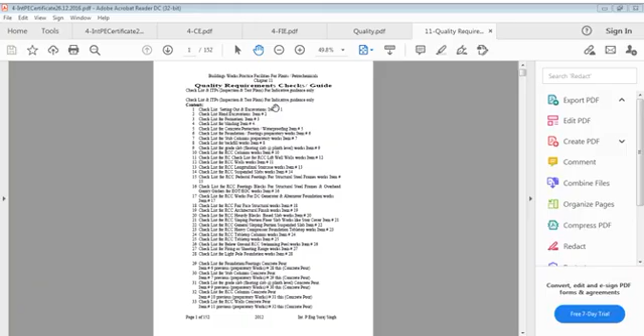Role of quantity, role of quality, all play a very important role in our life, in our world. You have to understand very well these points: quality issues in life and quality requirement.

I suppose nothing moves, or it moves only on tracks without any direction, without any strength, without any reliability.

When I say reliability, when I claim reliability, that means dependability, dependability involving safety, dependability involving service, and dependability involving durability, and all other factors we have to consider in our profession as well as in life.

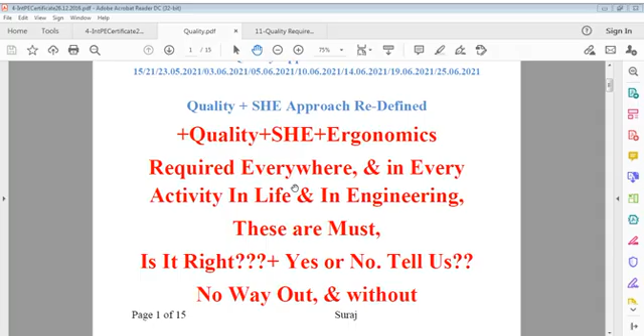Okay, I have supervised this project and it has been done according to this and this, and sign. Even though nothing was supervised, nothing was made sure, but certification exists. What do you call it? I don't understand. Just by a certification, if you assume everything was true, I can't believe it. And that's where lapse of quality occurs.

No quality, no SHE, nothing can work. In our construction we say safety first. Safety first. Safety means safety of every consideration. Individual safety, group safety, work safety, environment safety, health safety, everyone.

It's not simple that I should be safe alone. Scaffolding should also be safe. My colleague should also be safe. My site should also be safe. Traffic should also be safe. Water that we use should also be safe. Everything should be safe. It's not simply that I am safe as an individual.

You are safe if others are safe. Your group is safe if your thoughts are safe, if you comply with requirements of safety, then you are safe. Personal safety, PPE we call personal protective equipment, that's only one part of safety. There are many other parts of safety which can only be elaborated in safety subjects.

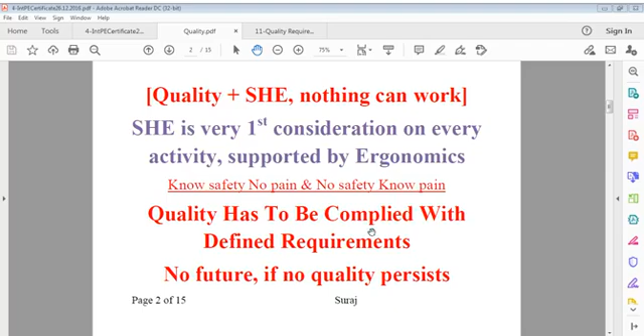If you don't comply with quality, the product is not responsible. The future of the product is not responsible. It is you who are responsible. We say engineers must realize quality facts. I say, why engineers only? Everyone.

Engineers, of course, they lead, but quality is for everybody. There can be no acceptance to discard quality. If you discard quality, I don't know what you achieve.

I don't understand that. Some people relate loss of quality to gain of money. How? If you lose quality, how can money come in? You may say you made money, but I don't know how you could make money by loss of quality. Robbery is there - how do you want to rob it? Loss of quality doesn't mean gain in money. There can be no gain in money if you lose quality.

Yes, there can be something different. If you change the specification - say you have to add 6 bags of cement of 50 kilograms each in 1 cubic meter of concrete, and you don't mix 6 bags, you mix 4 bags and make the same concrete, you can say you've saved 2 bags of cement in 1 cubic meter. But you cheat yourself, you cheat that material, and you think nobody knows. You produce that concrete by saving 2 bags of cement, yes, but what did you lose?

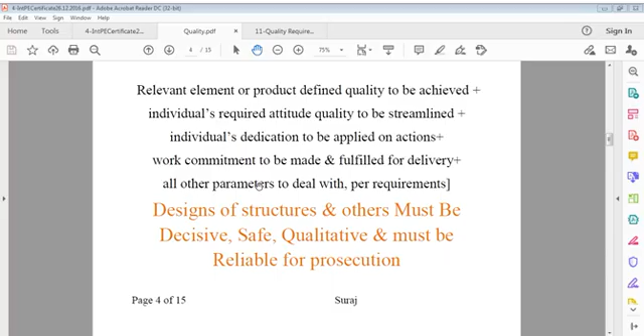Structures are structures. These are decisive because they are based on quality calculation and quality design, where everything is considered according to needs, according to requirements, according to scope of work. And it has limits, a start and an end.

Designs are never wrong if done with total control on site, control in mind. If you have experience of sites in addition to design knowledge, I think you'd be the best designer. Alone, design is not adequate.

It's the same thing as I say - CAT. A child says 'cat', and what is a cat? How a cat behaves, that child doesn't know. But that child knows this is a cat, a photo of a cat - more than that, the child doesn't know. So a designer must have a backing of practical construction. That designer can be much better than a solo designer.

Solo designer, I think, is not a requirement. Pragmatic design is a requirement which pulls all difficulties during construction into design consideration and makes provisions in such a way that site guy knows problem is solved.

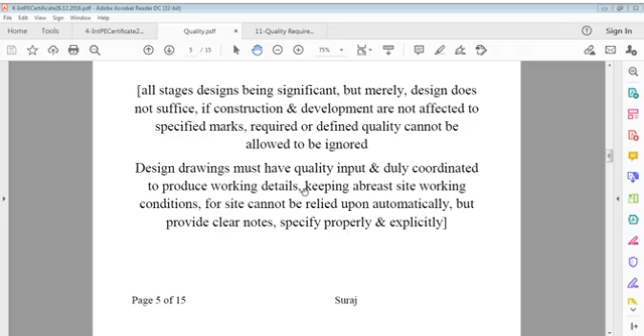If you think only theoretical, and don't think of practical problems, then there's a gap in engineering itself - coordination gap, self-coordination, coordination with others. During coordination, too much happens. I'm not going to repeat what's written on this file, but all these factors we have to consider very well, that's part of quality, design, and everything. You can't go otherwise.

Quality requirements - I have been doing this for few days or few weeks. What do we want? Every day I talk quality. Maybe those who watch this video start feeling bored, thinking the same thing this person talks every day. It's not talking, believe me. I'm talking something that critically deals with everyone.

I'm not saying you are not having a good house. You are having good house. If you think whatever house you have is good one, it's okay - it's within your bound, within your limits. But it doesn't contain what it should contain. Some people say it's enough if I have got a roof on my head, I have some accommodation, okay, that's right. I'm not saying you can't stay in whatever accommodation you have.

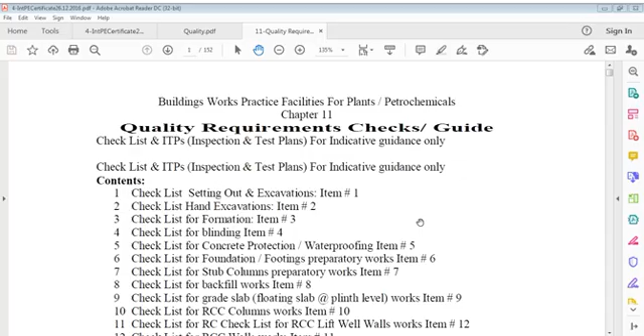Every time you have to work right. Work every time, do not repeat that work - meaning do not leave any defect to be repaired, because repair is expensive, it takes time, and it gives a bad feeling as well, a non-professional feeling. That feeling should also not exist.

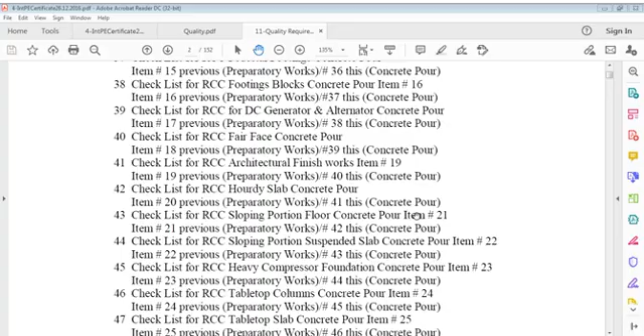There is a list of many quality issues - though it's not comprehensive, but still something is there. There are many activities on every structure, every activity works somewhere. In construction, there are many activities in every sub-discipline - building, bridges, roads, sewer lines, water lines, irrigation, railways, whatever type of building you say. A list of activities exists from commencement to completion.

Sometimes you'll see a huge volume of specifications on project and contract documents. You'll find big books with thick volumes, and in some instances you'll be horrified - bundles of drawings, so many bundles of volumes of specifications and contract documents. One gets mad immediately at this - how many documents? Yes, how many documents? This is the document, you have to read them.

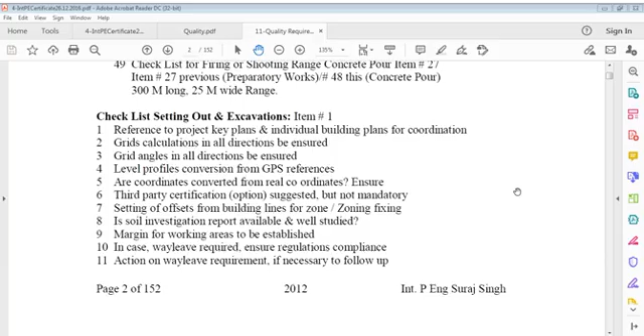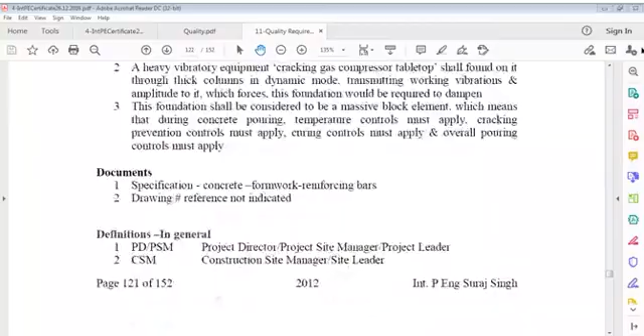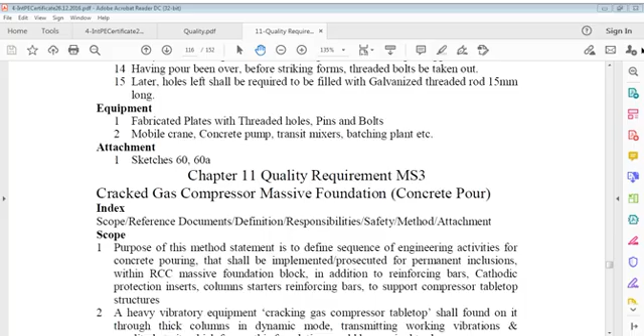Now, when I say yesterday I talked of many foundations, right? I talked of some foundation. Let me see which one I talked of before running away. It was... okay, that foundation, I just go back to the first one we talked of. I forgot also, that's my problem. Column plate inserts, no, I'm just talking of this column plate, actually inserts which were there. Just go back, see.

Alright, give me some time and I'll be back in a couple of minutes. I'm feeling thirsty also, let me take some water as well. Back, hold this, take water now.

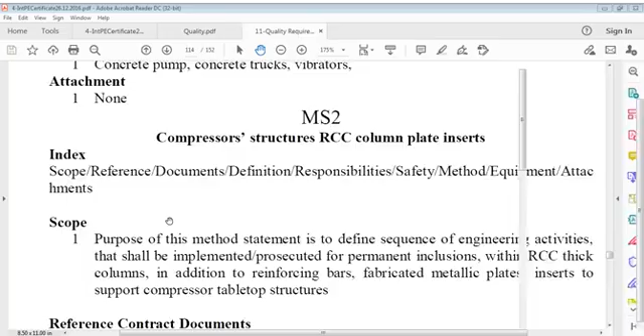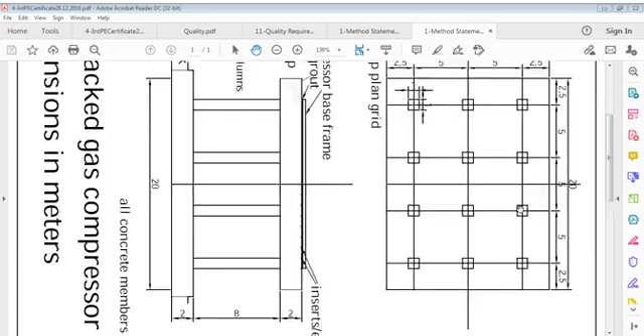I don't know, let me start the Zoom, let me see if I can show you that one. I'll just close this file, otherwise... this is actually your tabletop. This is tabletop, okay, I'll keep it open because I am going to do like that. It's a kind of tabletop, of course, and there's another one which I'd like to share again. Maybe that's that one, no, it's not that one, it's another one. Okay, that's another one, so there's another sketch, okay fine, there's two sketches, no issue.

I'll try to find that sketch once again, it's an important one because I have to explain to you on this, just to remind you what I was talking about. Sometimes we forget, it happens because there are so many sketches in this, and I have to show you. Maybe, I think it is in method statements, chapters, sketches, and that sketch is here. I hope this will be column plate inserts, if I can get it. Pipe culverts, what is the... column form, column inserts, I think maybe it's that one. So I got it, it's there, so I got it here, and it's another one, it's two, I say.

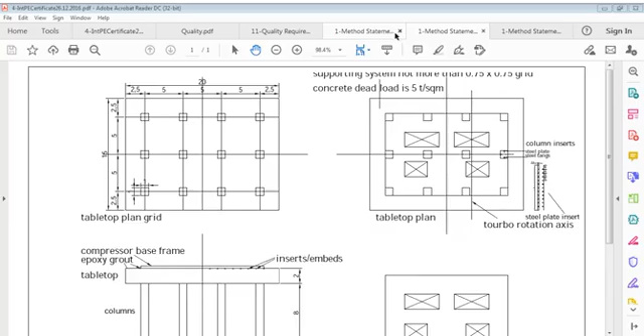So first I will talk about the inserts and the relation of this column. The inserts I'm going to discuss with you are in this column. How many columns are there doesn't matter, columns are there in this way, or columns maybe are just like this, there are different sizes of foundations. I am talking for means, just don't stick to what the sketch is, but stick to what's required.

In these columns here, we say in this column there are inserts here. You can see steel plates, insert plates here. These are steel plates here and steel tangs here, steel plate and steel tangs. These are meant for some reasons in thick material, thick members, and maybe generally steel is used for some purpose.

Here, bars are all in for tension, compression or bending moments. But these are here because this is a thick column, and you can say this is a kind of concentrated reinforcement. Just like we say in beams and columns, we say in deep beams and deep columns, this is concentration. Or you can say skin reinforcement, you may say that, I think that's the right word.

Skin reinforcement, so this can also be called that, because this is only one insert with ties at different locations on one side of the column. It's given as one, but it may be two. Let's say one is enough there, or two are enough there, depending on design. So we can say this is a kind of skin steel fabrication, fabricated steel fixed at some side, and it could be called a skin plate, or this is a fabricated plate put in column sides for whatever reason.

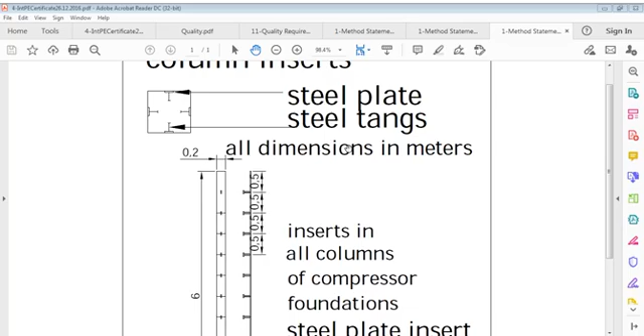It depends on requirements. So you can see this kind of additional reinforcement that goes in addition to the bars here. These bars mean stresses to take at this support for skin sides and all that. That's what I understand. These are inserts.

I call them steel plate inserts. This is the plate here, and you can see these ties, for example 1, 2, 3, 4, 5, 6, 7, 8, 9, 10, 11, or more. Inserts in all columns of the compressor foundation. This is what it says, and we have to understand this point.

This also, another one, size of column is 1.5 meter by 0.8, and also there are safety requirements which we discussed here, and we have to take all into consideration.

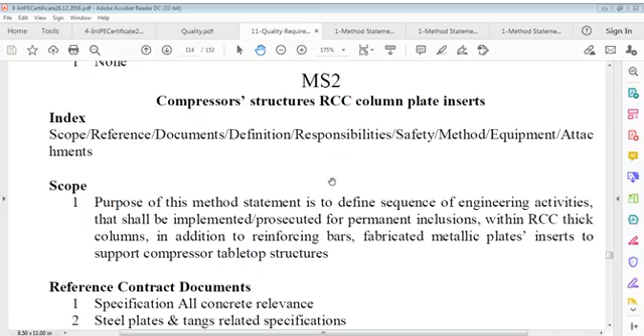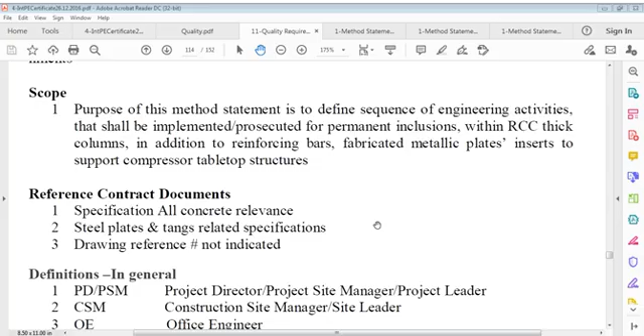But now we are talking of inserts here, and this requirement, what it says about column plate inserts, we talked before. So we have to say, in fact, the purpose of this method statement is to define the sequence of engineering activities that shall be implemented and prosecuted for permanent inclusions within RCC thick columns, in addition to reinforcing bars, fabricated metallic plates, inserts to support compressor table structure.

This was its requirement, and I'm not going into responsibilities and all that because you have already heard this. I was telling you, now I'll go to the same inserts which will be required in the tabletop as well, but now I'm going to discuss the quality requirements. The name is this quality requirement of this file, and this is chapter 11 of this file.

That is, may say, file of facilities. This is for facilities. You can say facilities means plant. Plant doesn't mean small plant. This means process plant, where there's some technology involved in production of something or reformation of one product to another. That is this one. We may call it facility, you may call it plant, you may call it whatsoever, mega project.

Generally all such projects are mega because these cover a lot of space or area, you can say in kilometers by kilometers, and generally there is one original plant which we call refinery for fossil fuels, where raw material is received and processed. That's called refinery, and there are so many byproducts from that process plant which are further required to be transformed.

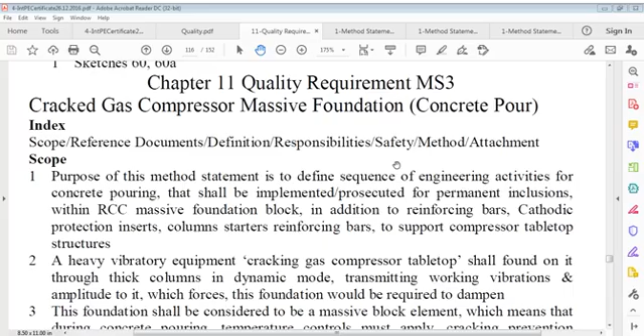We have to take this into point. Now I'm going to just talk on this concrete pour. Purpose of this method statement is to define sequence of engineering activities for concrete pouring that shall be implemented, prosecuted for permanent inclusions within RCC massive foundation block, in addition to reinforcing bars, cathodic protection inserts, column starters, reinforcing bars to support compressor tabletop structures.

A heavy vibratory equipment, called cracking gas compressor tabletop, shall be founded on it through thick columns. This equipment takes its life from thick column in dynamic mode, transmitting working vibrations and amplitude to it, which forces this foundation would be required to dampen.

This foundation shall be considered to be a massive block element, which means that during concrete pouring, temperature controls must apply, cracking prevention controls must apply, curing controls must apply, and overall pouring controls must apply.

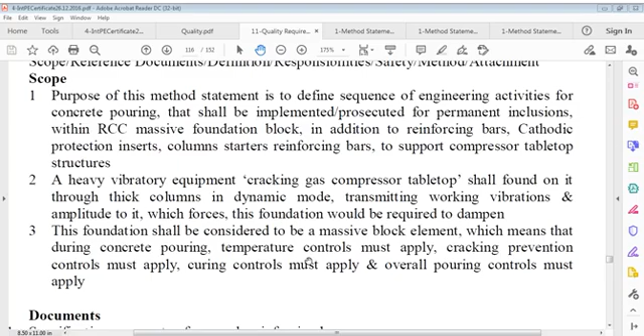Here there are some references, you know that. Then there are certain duties and definitions. Then we go to something like, very common about safety, which we say that safety officer shall monitor all daily activities being conducted or carried out.

So, safety officers shall monitor all daily activities being conducted or carried out on site, advising and implementing all safety procedures if some measures are observed missing. Now, prior to commencement of whatever activity, workforce shall receive a STARRT card toolbox talk on project safety site requirements respecting involved item or activity.

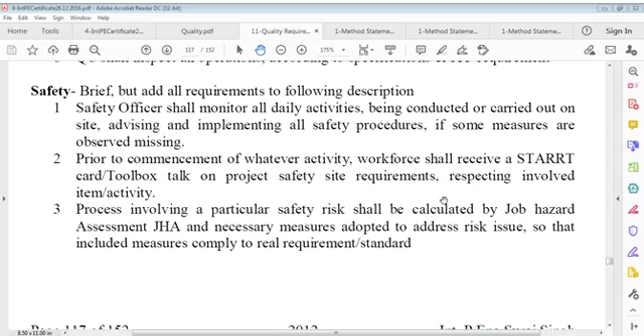Only competent personnel shall be engaged to carry out specific operations. Personnel shall use all necessary safety related PPEs, personal protective equipments, required for all pertinent activities.

Ample availability of water should be made on site for workers as well as for all other purposes.

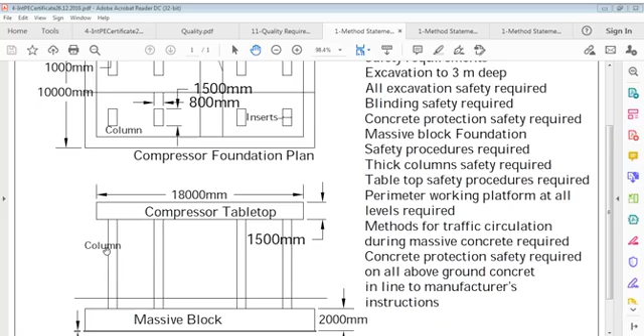The following main activities shall be involved for this foundation. What foundation? You can see this foundation, this massive block - here are the safety requirements for everything. There's excavation up to 3 meter depth - excavation safety required, blinding safety required, concrete protection safety required, massive block foundation safety procedure required, thick column safety required, tabletop safety procedures required.

Now in these columns below these foundations we are talking of, this is the foundation - this massive block. So this is set out and required coordinates at all corners to be used, and marking all areas including external working offsets.

Offsets for purpose of foundations, excavations and circulation areas for ease of construction. Recording all existing reduced levels from site within areas to be covered for excavation, reconfirmation regarding all surveys activities to determine accuracy, since no changes in setting out should be permissible due to implementable proposed running utilities.

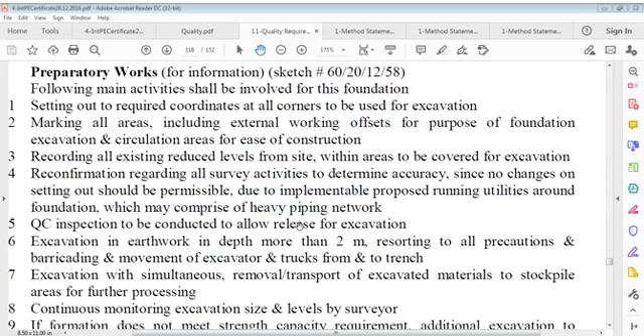We'll go to QC inspection after this. Whatever we do, says confirmation regarding all surveys, and then we have to do QC inspection, excavation, earthwork in depth more than 2 meters - we have to resort to all precautions and barricading, etc.

If the formation we reach doesn't meet the strength requirement of our design, then we have to replace bad soil from there, maybe in 2 layers or 1 layer - let us say 2 layers, it depends what you consider. Then you have to take out that soil and prepare for soil improvement in form of adding better soil. Then that was imperative.

Up to 98% of MDD should be achieved.

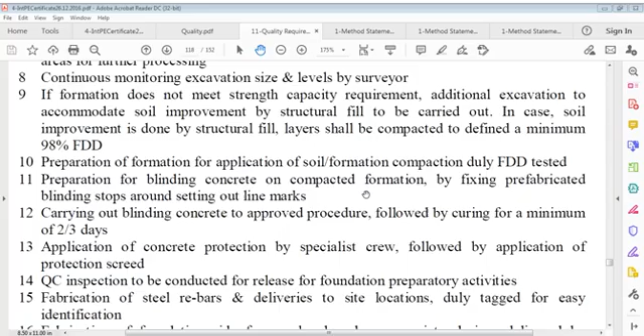Then we go to carrying out blinding concrete to approved procedures, followed by curing for a minimum of 2-3 days. So blinding concrete preparation is a must - you have to compact the area, then prepare the side shutters for blinding, which is very small, and cure it for 2-3 days. Application of concrete protection requires a specialist vendor, followed by application of protection screed.

QC inspections to be conducted for release of foundation preparatory works or activities. Fabrication of steel rebars and deliveries to site location, duly tagged for ease of identification. Fabrication of foundation side forms based on proprietary designs, preformed.

Fabrication of steel rebars and deliveries to site locations, duly tagged for easy identification. Fabrication of foundation side formworks based on the proprietary design, deliveries delivered by a specialist vendor in line to specifications.

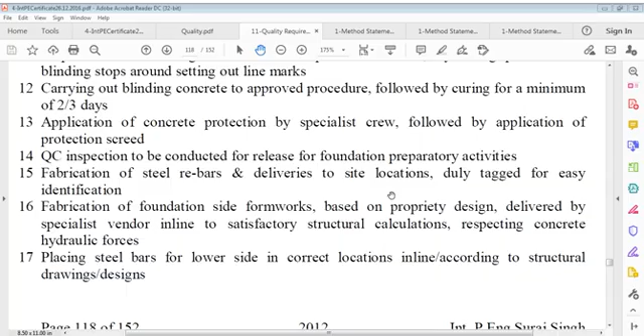There is a fabrication foundation side form based on proprietary design delivered by the specialist vendor, in line to satisfactory structural calculations respecting concrete hydraulic forces, placing steel bars for lower side in control in correct location according to structural design.

Placing chairs suitable to requirements, fabricated out of heavy steel bars to support upper layer of rebars, placing steel bars for upper side in correct locations in line according to structural drawings and designs, placing all column rebar dowels for superstructure columns, pertinent tabletop erection, installation, fixing formworks to foundation sides in line according to setting out line marks, fixing cathodic protection.

Fixing cathodic protection anodes to exact locations within foundations and welding them, fixing stainless steel C clamps and GI wire rope to main steel reinforcing bars around foundation at defined locations.

Critical cathodic protection shall be provided for such a heavy foundation in line to design provisions. Electrical continuity tests shall be conducted for records and submissions.

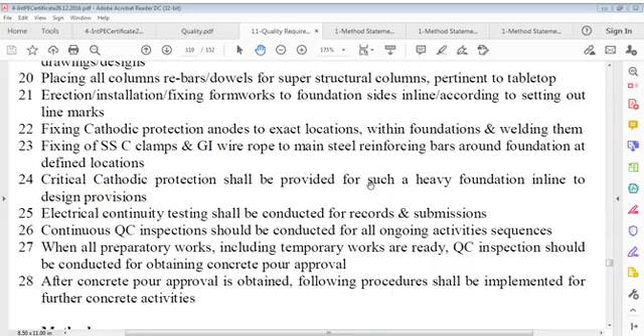I'll define this, and the other two statements are like this, just quantities will be different. I'm going to define you about this.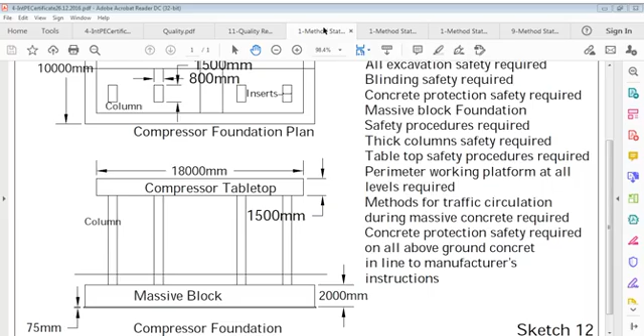So we must understand all this before going further. This method gives you details of this plan, how many concrete pumps are required, batching plant, how many work.

You may say if you need per hour, let us say whatever it is, transit mixer is 7 meter or 8 meter cube, and there are 10 numbers required.

So you have a plan of 12 hours, for example 12 to 14 hours. Let's say 12 hours means 600 cubic meters, 50 cubic meter per hour continuous delivery. Generally, efficient production of a batching plant is 35 cubic meter per hour, so you may need 2 continuous mixers working to achieve this delivery of 50 cubic meter per hour.

That point must be considered, and the plant operators know all this. You just tell them your requirement per hour, and they will arrange delivery of mixers. For example, to get 50 cubic meter in 1 hour, keeping aside some margin, they will say 60 cubic meter in 1 hour, which means every 10 minutes they deliver you 7 or 8 cubic meter, giving you 6 trucks every hour.

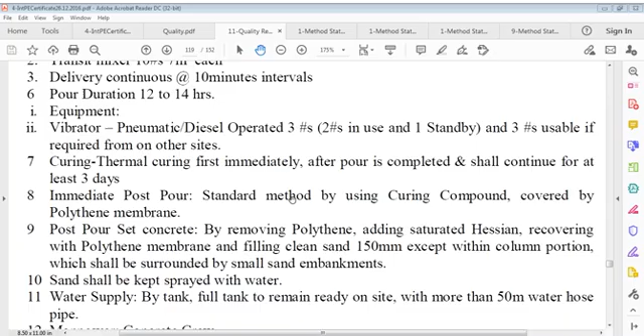All curing should go on continuously for 3 or 4 days for thermal curing application and then normal curing application. A full tank should be there to provide water, with length of hose requirement depending on site to tank distance. Generally 50 meters is enough.

Then we have to describe manpower requirement - work person requirement, concrete crew requirement, how many foremen you want, leaders, how many steel fixers you need, and carpenters you need, depending on your assessment. That is the purpose of this statement.

How many masons, because this is a big job, surface area let's say 200 or 300 square meter. Immediate work is wanted so you don't delay, you have to do it fast, which means everywhere you have to let them sit down and work. Helpers are also given according to masons - if 16 masons, means 5 or 6 more helpers with them, because the helper's job is not too much in that case, the mason's job is more.

Then we can say all specifications and requirements to be complied with, all activities to go on site. We say GGBS, ground granulated blast furnace cement, we have to use according to BS 4246, 70% replacement, utilizing 30% ASTM C150 type cement for use in massive concrete, or whatever cement you are going to use - just a reference. You have to decide yourself which one to use and how much replacement with GGBS, which is a pro-environmental material.

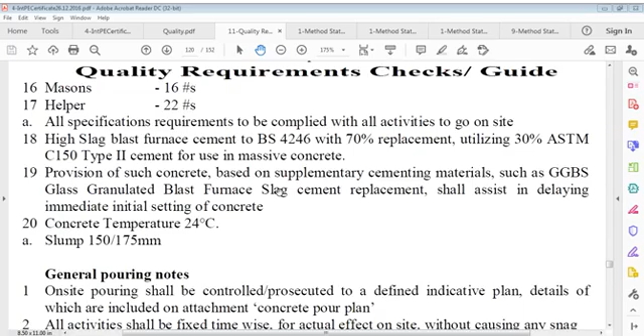So general pouring notes are... I think I have to put this down somewhere. Let me close something like that, and it's better to close like this. I'll close this. So let's go and discuss something else.

Now, generally you can say pouring notes: on-site pouring shall be controlled or executed according to the defined indicative plan which I have shown to you.

This is the concrete pour plan. These activities shall be fixed time-wise for actual effect on site without causing any snag. Locations of concrete pump, transit mixers, start points, follow-up points of pour, intended directions respecting concrete delivery and placement have been depicted on the plan. Each strip and its location vertically have been indicated to follow such that no cold joints are allowed.

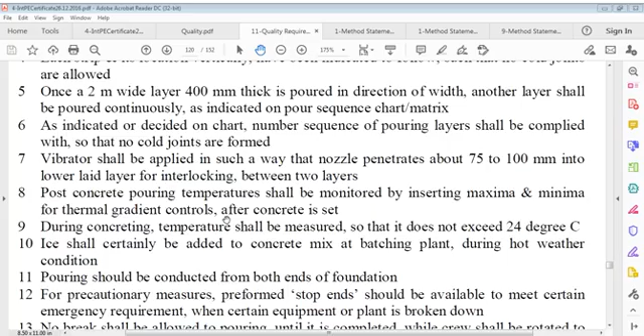Once a 2-meter wide layer, 400 mm thick, is poured in the direction of width, another layer shall be poured continuously, as indicated on the pour sequence chart or matrix. As indicated or decided on the chart, the number sequence of pouring layers shall be complied with so that no cold joints are formed.

Vibrator shall be applied in such a way that the nozzle penetrates about 75 to 100 mm into the lower laid layer for interlocking purpose between two layers. You have to withdraw the vibrator nozzle from the previous layer gradually, don't give it a shock.

Post concrete pouring, temperature shall be monitored by inserting maxima and minima for thermal gradient control after concrete is set, which requires installation of thermocouples as well. During concreting, temperature shall be measured so that it doesn't exceed 24 degrees Celsius.

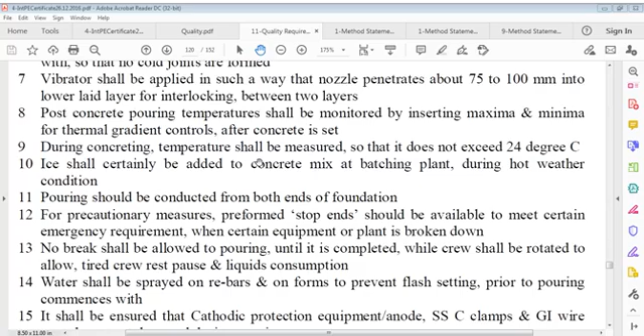Ice shall certainly be added to the concrete mix at the batching plant during hot weather conditions. Pouring should be conducted from both ends of the foundation for precautionary measures.

Preformed stop ends, meaning shutters, should be available to meet certain emergency requirements when certain equipment or plant is broken down. No break shall be allowed to pouring until it is completed.

No break shall be allowed to pouring until it is completed, while the crew shall be rotated. Water shall be sprayed on rebars or forms to prevent flash setting prior to pouring commencing. Also, no break shall be allowed to pouring until it is completed, while the crew shall be rotated to allow tired crew rest and liquid consumption. It shall be ensured that cathodic protection equipment, anode, stainless steel C clamps, and GI wire rope do not get damaged during pouring.

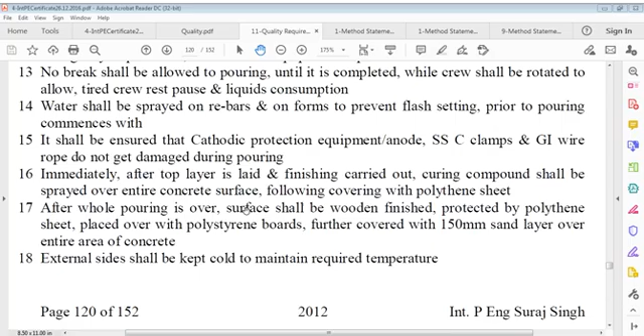Now, external sides of the section shall be kept cold to maintain required temperature. After the whole pouring is over, the surface shall be wooden finished, protected by polythene sheet placed over with polystyrene boards, further covered with a 150 mm sand layer over the entire area of concrete. External sides shall be kept cold to maintain required temperature.

Water shall be continuously poured over sand to keep the top system cold, not allowing any transmission of heat either from the surroundings or from the massive block. Observations regarding rising and falling thermometers and thermocouples shall be conducted per procedures.

So either from surrounding or from the massive block to the environment, observations regarding rising and falling thermometer, thermocouple shall be conducted per procedures for monitoring thermal gradient within the concrete. The whole area shall be barricaded with no further work allowed until the first 3 days of heat curing, thermal curing, is completed, to be followed by routine curing for a defined number of say 14 days.

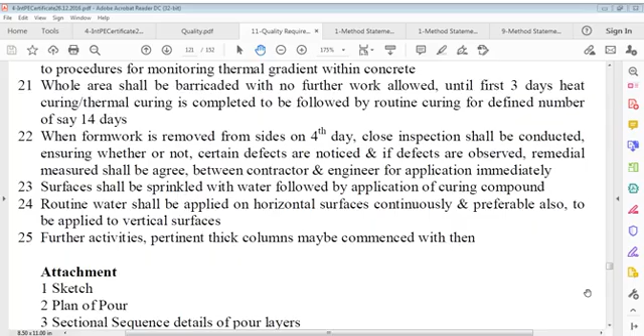So we can now go further and say that routine water shall be applied on horizontal surfaces continuously, and preferably also applied to vertical surfaces. Further activities pertaining to thick columns may be commenced with then. So attachments are sketch, pour plan, sectional sequence, details of pour. Now we are going to the compressor concrete pour.

Purpose of this method statement is to define the sequence of engineering activities for concrete pouring that shall be implemented for permanent inclusions within the RCC massive foundation block, in addition to reinforcing bars, cathodic protection inserts, column starters, and reinforcement.

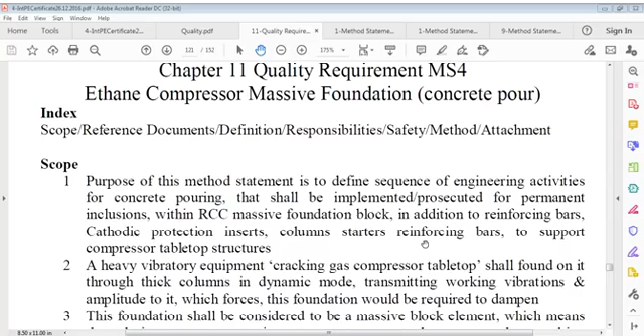So we will start this now. Scope is same as it was in the gas compressors. There's no difference in scope, and you can see specification and definitions are all the same, word by word, everything is the same.

We talk of method here, that's different. Others are same, method we talk of here is different. Every case is different, we have to keep that in mind because quantity is different, size is different.

In this case, we have a size which is 280 cubic meter approximately, maybe more, maybe less. Don't go to that one. Pour plan we have same, just like we had before, but I did not make the plan separately for this. System is same, procedure is same, length and width of plumb foundations you have to see.

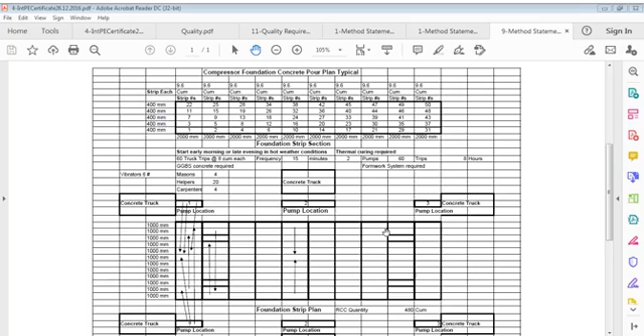You have to see quantity, how many. There are of course 5 layers, let us say 200, and each layer, how much it is coming, you have to find out. You have to fix this way, meaning it should move like this through all these layers. You can change sequence, you can do whatever you want, and you can select location of pumps and trucks, and you can decide whatever else.

In the morning you want to start that time. Then you can say, of course, batching plant you need, one working, one standby, transit mixer you need, how many cubic meter each, how many numbers.

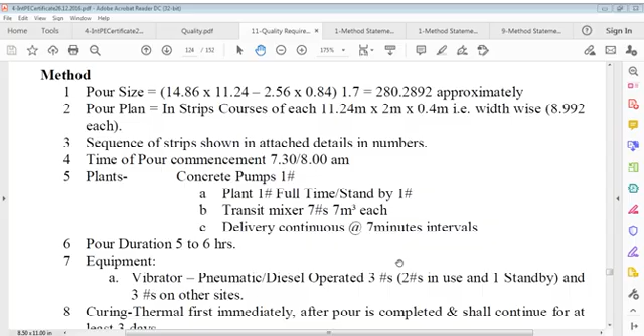Then 7 minutes interval are given to frequency of arrival of delivery mixers, and pour duration you are saying 5 to 6 hours. You can see it's not like before, 12 hours, it's nearly half of that, but principle is same. Vibrator you require, standby and otherwise, and you need curing material same as before, thermal curing and other curing, normal curing.

So you can say same, nothing changed, same type of curing material. Immediate post pour curing by curing compound covered by polythene sheet, and post pour set concrete by removing polythene sheet, add saturated hessian and recover that with polythene.

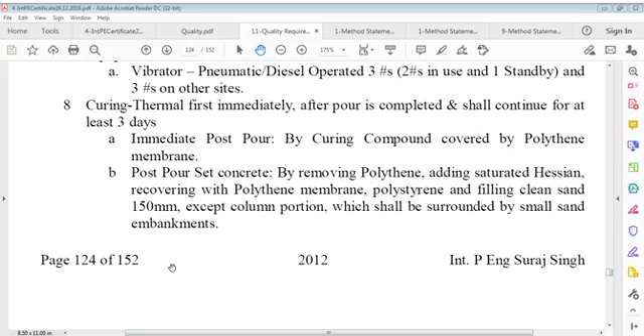Now this is what the curing plan is. This means first you have to do thermal curing and then you have to follow up with routine curing.

Here strength, you see, water supply of course is same, you have to provide tank, and you have to differentiate on workforce. You can change, you can keep same, it's up to you, because time is also same, about half. So this means strength should be same.

Now all specification requirements to be complied with, activities to go on site, same, blast furnace slag and BS 4246, 70% replacement of cement by slag, provisions of such concrete based on supplementary cementing materials.

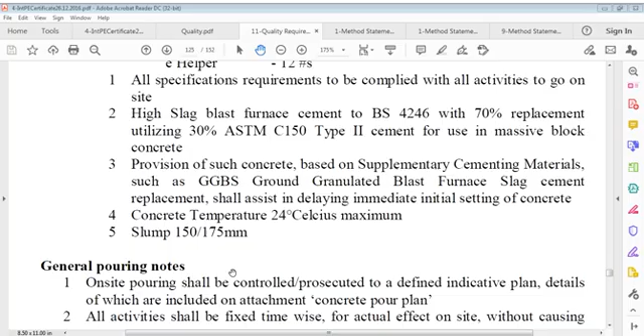So trap parameters are same, temperature is same, everything is same, there's no change, so we will not discuss that one. Same way, general pouring mode notes, meaning word by word is same.

Again you can see, for refreshing, on-site pouring shall be controlled and prosecuted to a defined indicative plan, details of which are included on attachment concrete pour plan, and that is this much. Again I'm telling you this much, you can find sequence by sequence. You can design other tables like this, designing is not a problem.

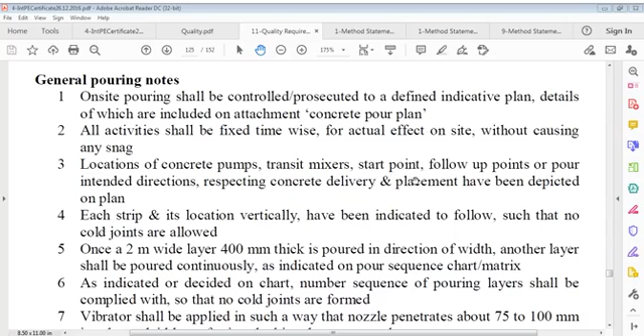On-site pouring shall be controlled and prosecuted to a defined indicative plan, details of which are included in the attachment concrete pour plan. All activities shall be fixed time-wise for actual effect on site without causing any snag. Locations of concrete pumps, transit mixers, start points, follow-up points of pour, and intended directions respecting concrete delivery and placement have been depicted on the plan.

Each strip and its location vertically have been indicated to follow such that no cold joints are allowed. Once a 2-meter wide layer, 400mm thick, is poured in the direction of width, another layer shall be poured continuously as indicated on the pour plan. As indicated or decided on chart, the number sequence of pouring layers shall be complied with so that no cold joints are formed. The vibrator shall be applied such that the nozzle penetrates about 75mm to 100mm into the lower layer for interlocking between two layers.

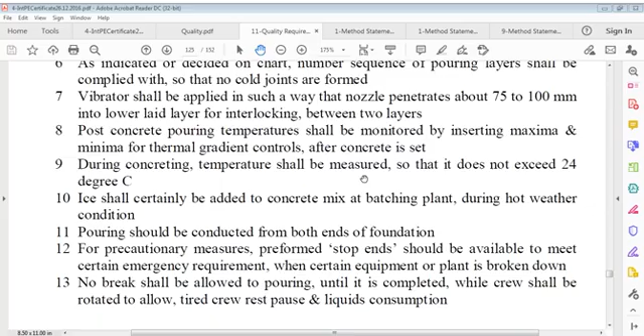During concreting, temperature shall not exceed 24 degrees Celsius as required for this section on massive blocks. In case it doesn't work, you have to add ice to the concrete mix at the batching plant during hot weather conditions.

Pouring should be conducted from both ends of the foundation for precautionary measures. Preformed stop ends are a very important item. You may have so many stop ends; for a 400 depth pour, maybe 500 stop ends should be available for emergency use. Prefabricated stop ends can just be put in on the concrete when you have to stop, so it may not be 100% stable, but stability is more important.

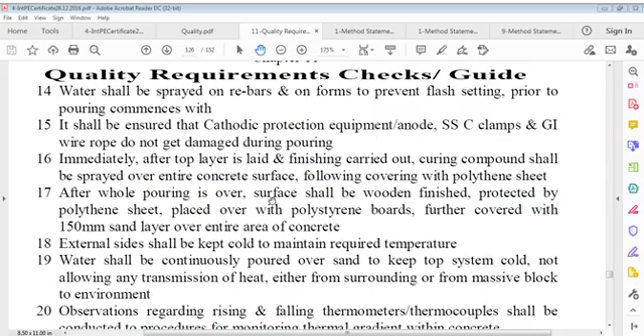Immediately after the pour, after the top layer is laid and finishing carried out, curing compound shall be sprayed over entire concrete surfaces, following covering with polythene sheet. After the whole pouring is over, the surface shall be finished, protected by polythene sheet, placed over with polystyrene blocks and boards, further covered with a 150mm sand-bagged layer over the entire area of concrete.

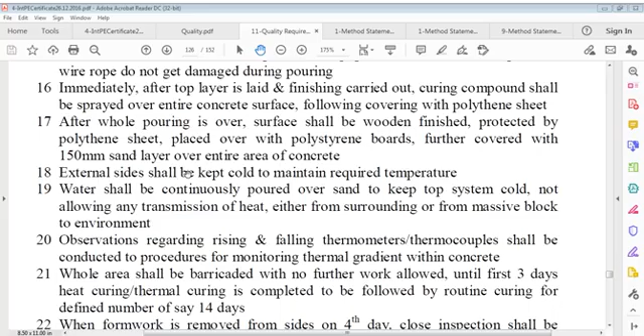The external side shall be kept cold to maintain the required temperature. Water shall be continuously poured over the sand to keep the top system cold, not allowing any transmission of heat either from the surrounding area or from the massive block or environment.

The whole area shall be barricaded. No further work allowed until the first 3 days of heat curing. Thermal curing is completed, followed by further curing for a defined number of days - 14 days.

When formwork is removed from sides, a close inspection shall be conducted to ensure whether or not certain defects are noticed, and if defects are observed, remedial measures shall be agreed between contractor and engineer. Immediately, the surface shall be sprinkled with water, followed by application of curing compound. Routine water shall be applied on horizontal surfaces continuously, and preferably also applied to vertical surfaces.

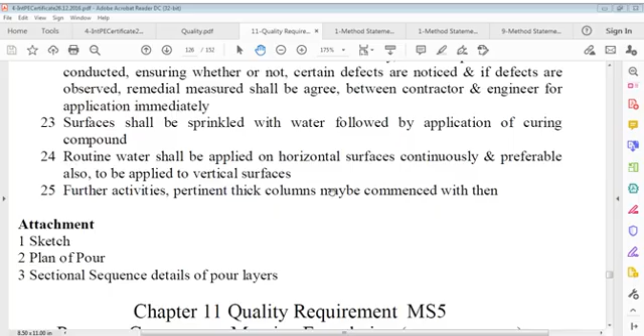This is method, 150 cubic meter like that. Just like that again. Method, you can see, is difference in quantity only.

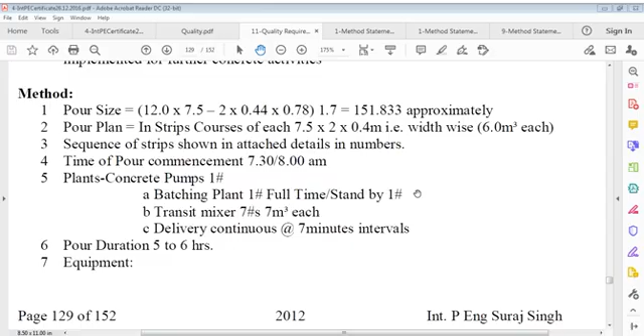Pour plan you have to prepare for this, particularly for all these three methods. You have different planning, method you have to devise, number of laborers and workers you have to decide, time of pour you have to decide. Equipment you have to use, for example batching plant one or two, transit mixers, how many, delivery continuous, pour duration, how many hours, equipment or what.

Then curing, same, there's no difference in curing. Workmen, how many units you have to define, not necessary, it can be different. Or if you want to keep same hours but same numbers, it's not going to work.

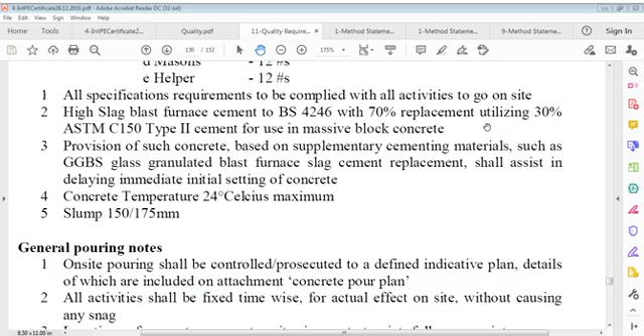Now we have attempted to find workforce here, and we have seen that all specifications are same. There's no difference in those specifications. What by what is the same temperature, 24 degrees, same BS code, 70% replacement. What should be temperature, what should be slump, all the same. General pouring notes also same. There's no difference at all in this, as we said before. Attachments are same. Now tabletop we have here.

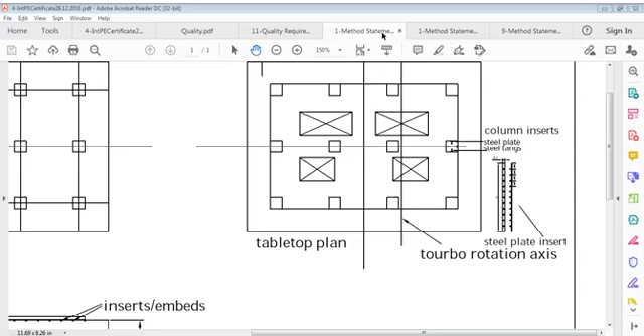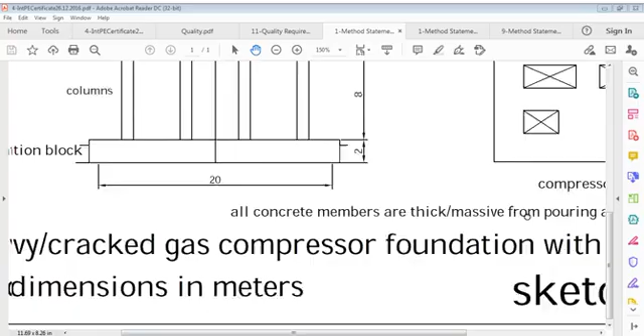Tabletop. It is, as I said, what is tabletop? Here is tabletop, this is tabletop here. The many inserts here you can see. This is plan of tabletop, compressor area, and this column inserts, and some of them somewhere here also will be inserts.

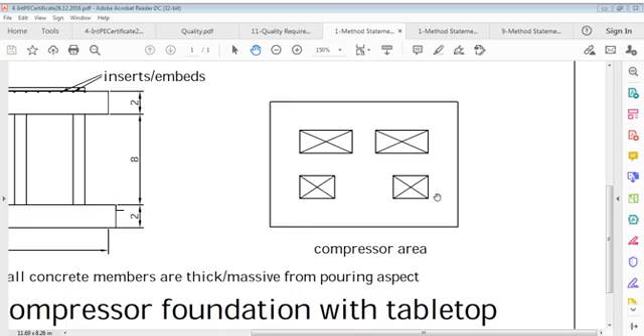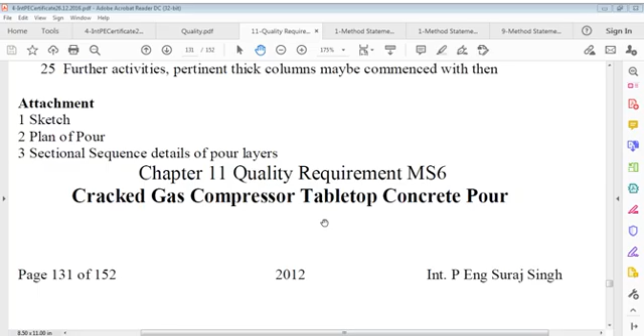Now in this statement we are saying the purpose of this method statement is to define sequence and methodology that shall be implemented for concrete pour, the cracked gas compressor foundation tabletop, which is RCC frame beam structure, a considerable size massive block. Got it? Means sequence and method are events that to be implemented for concrete building.

So we can say again, purpose of this is a heavy equipment compressor foundation, a heavy equipment compressor foundation on it, in dynamic mode, transmitting, working platforms and.

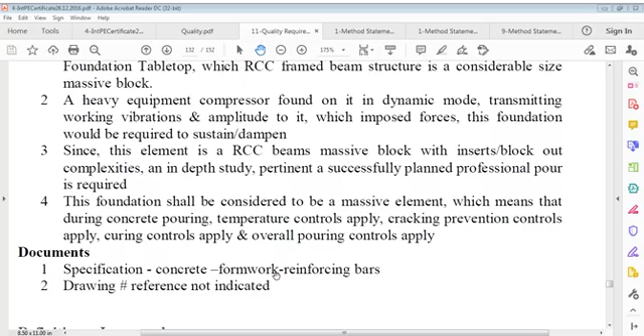This foundation shall be considered to be a massive element, which means that during concrete pouring, temperature control applies, cracking prevention controls apply, curing control apply, and overall pouring controls apply. Specifications we know what these are: concrete, formwork, reinforcing bars, drawing number reference not indicated. So same, definitions all same except safety. Safety is same.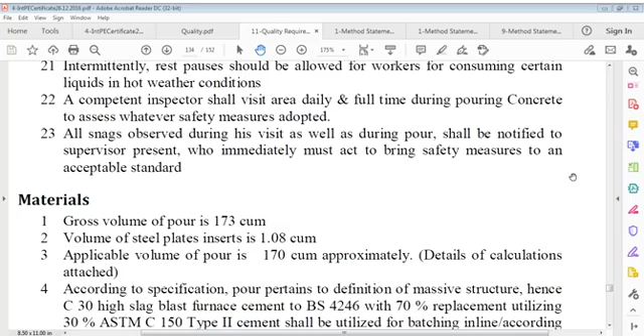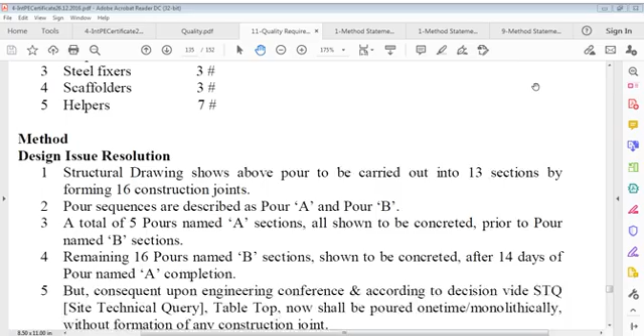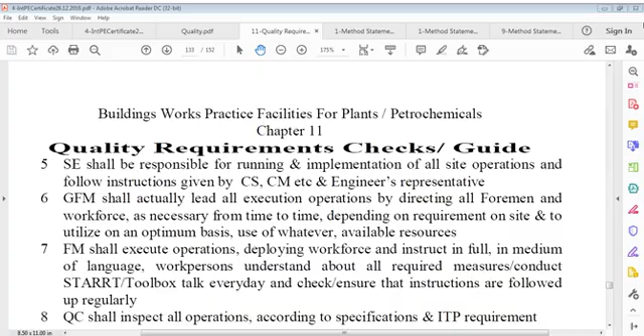Then you can see what do we need, what we don't need, we have to scrutinize that. Now, in this, a very important point that we have to discuss is, let us repeat this. This is also a very important point here.

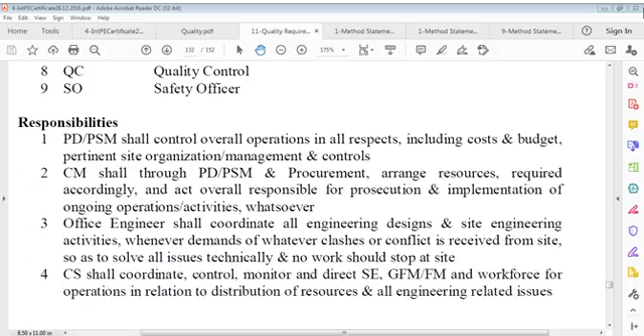I have added something here. If you see, office engineer, you have added here. Let us see what's the reason behind this addition.

It's not that difficult to understand. PD, PSM shall control overall operations in all respects, including cost and budget, pertinent site organizations, management organization controls. CM shall, through PD or project director, PSM and procurement, arrange resources required accordingly and act overall responsible for prosecution and implementation of ongoing operations and activities whatsoever.

Office engineer, which I've added here, is actually a very important position. Office engineer shall coordinate all engineering designs and site engineering activities wherever any clashes or conflicts are received from site. Though superintendents and engineers will try to resolve it, if at random they can't find a solution, it is brought to the office engineer, who shall go into details of all these technicalities and what problems exist, and try to formulate a query.

If it's not able to solve itself, that query shall go to the competent person of the contractor or engineer, and they either give a proposal for the solution, which we approve, or otherwise they give their own solutions.

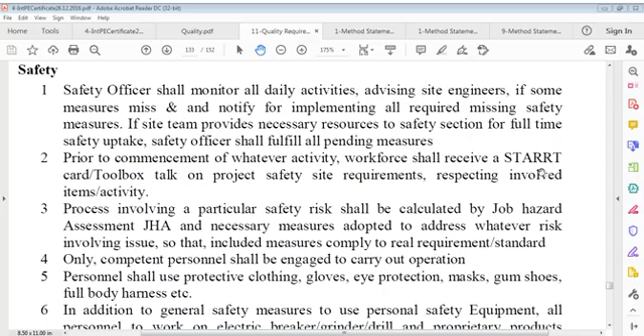Safety officer shall monitor all daily activities, advising site engineers if some measures are missing, and notify for implementing all required missing safety measures. If the site team provides necessary resources to the safety section for full-time safety uptake, safety officer shall fulfill all pending measures. Prior to commencement of any activity, workforce shall receive a STARRT card or toolbox talk on project safety site requirements respecting involved items.

Activity or process involving a particular safety risk shall be calculated by job hazard assessment, JHA, and necessary measures adopted to address the risk involved, so that included measures comply to the real requirement standard. Only competent personnel shall be engaged to carry out the operation. Personnel shall use protective clothing, gloves, eye protection, masks, gum shoes, full body harness, etc.

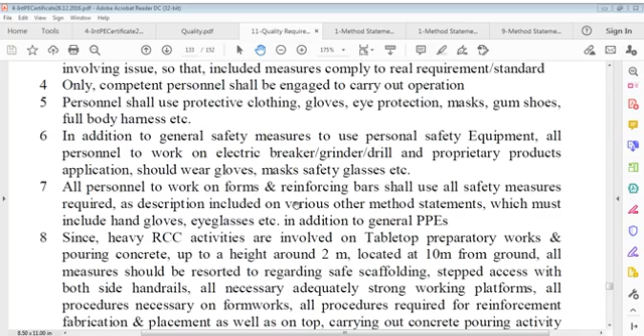In addition to general safety measures for personal safety equipment, all personnel working on electric breaker, grinder, drill and proprietary product applications should wear gloves, masks, safety glasses, etc. All personnel working on forms and reinforcing bars shall use all safety measures required as described in various method statements, which must include hand gloves, eyeglasses, etc., in addition to general PPEs.

Since heavy RCC activities are involved on tabletop preparatory works and pouring concrete up to a height around 2 meters, located at 10 meters from ground, all measures should be resorted to regarding safe scaffolding, stepped access with both side handrails, all necessary adequately strong working platforms, all procedures necessary on formworks, and all procedures required for reinforcement fabrication and placement, as well as carrying out concrete pouring activity to proven technology. It's a difficult statement to understand, let me repeat it - it's not direct but a difficult one.

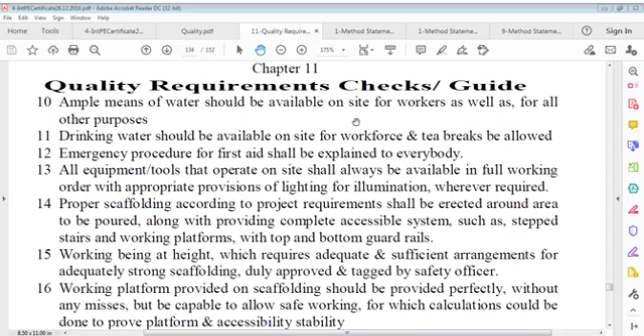Ample means of water should be available on site for workers as well as for all other purposes. Drinking water should be available on site for the workforce and tea breaks be allowed. Emergency procedure for first aid shall be explained to everybody.

All equipment and tools that operate on site shall always be available in full working order, with appropriate provisions of lighting for illumination wherever required. Proper scaffolding according to project requirements shall be erected around the area to be poured, along with providing a complete accessible system such as stepped stairs and working platforms, with top and bottom guardrails, for working at height.

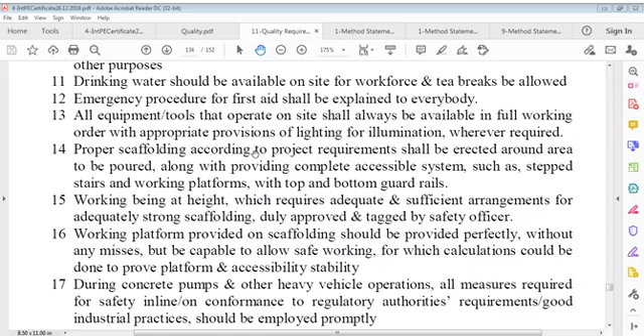One more point - drinking water should be available on site for tea breaks, and emergency procedures explained, along with all equipment, tools and lighting. Proper scaffolding according to project requirements shall be erected around the area to be poured, along with providing a complete accessible system such as steps, stairs and working platforms with top and bottom guardrails.

Working at height requires adequate and sufficient arrangements for adequately strong scaffolding, duly approved and tagged by the safety officer. Working platforms provided on scaffolding should be provided perfectly without any misses, but be capable to allow safe working, for which calculations could be done to prove platform and accessibility stability, required for safety in line or conformance.

Calculations could be done to prove platform and accessibility stability. During concrete pump and other heavy vehicle operations, all measures required for safety in line or in conformance to regulatory authorities' requirements and good industrial practices should be applied promptly.

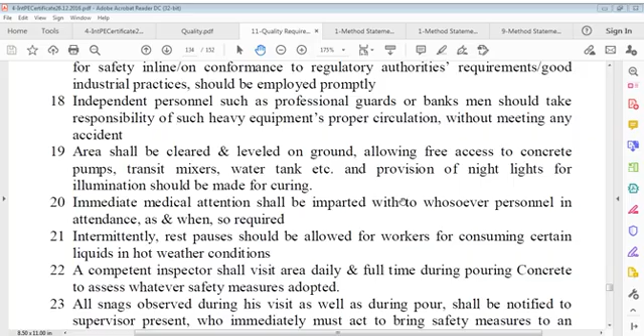Independent personnel such as professional guards or banksmen should take responsibility for such heavy equipment's proper circulation without meeting any accident. Areas shall be cleared and leveled on ground, allowing free access to concrete pumps, transit mixers, water tanks, etc., and provisions of night lights for illumination should be made for curing.

Immediate medical attention shall be imparted to whosoever personnel is in need, as and when so required. Intermittent rest pauses should be allowed for workers, consuming certain liquids in hot weather conditions.

A competent inspector shall visit the area daily and full time during concrete pouring to assess whether safety measures are adopted. All snags observed during his visit as well as during the pour shall be notified to the supervisor present, who must immediately act to bring safety measures to an acceptable standard.

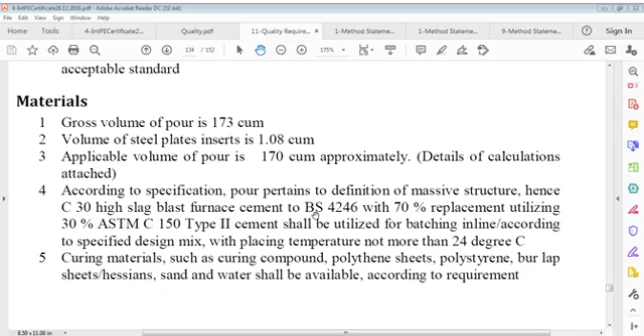Regarding material, the gross volume of pour is 173 cubic meters, and volume of steel plate is about 1.08 cubic meters. We did inserts with the column, and we are doing the same in this tabletop in horizontal position, horizontal shutters and vertical as well. Applicable volume of pour is approximately 170 cubic meters. Details are attached, not in this case but attached on resubmission according to specification.

The pour pertains to the definition of a massive structure, and the high slag blast furnace cement C30 with 70% replacement is used, cement that is BS4246, with 70% replacement. 30% ASTM C150 type 2 cement shall be utilized for batching in accordance with the specified design mix, with placing temperature not more than 24 degrees Celsius.

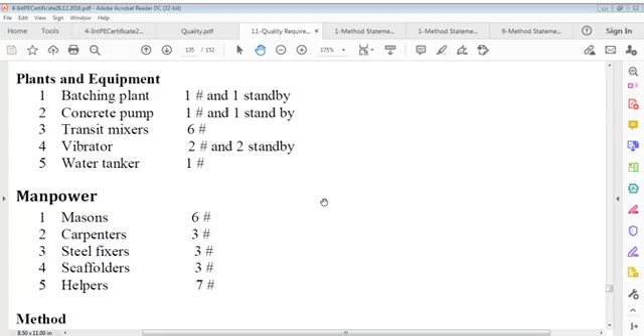Curing materials such as curing compound, polythene sheets, polystyrene, burlap, hessian, sand and water shall be available according to requirements. Plant and equipment requirements: batching plant 1 and 1 standby, concrete pump 1, transit mixer 6, vibrator 2, and water tank. Workforce includes masons, carpenters who will fix all that.

And the method is here. There's one thing to say, it was a question of design review. Let me see the time balance, how much. It's already 3 hours 15 minutes. Well, 2-3 minutes more and we'll see. In this case, we'll say design review.